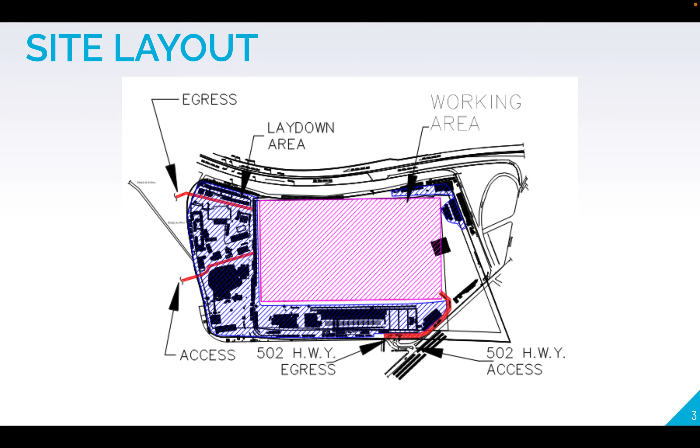When analyzing this project, there were a few issues which required further care. This includes one overall goal and two subsequent goals. First goal can be simply described as the epitome of construction, the three pillars of project management. This is to ensure that there is an adequate balance between project cost, duration, and scope to maintain the quality. This is paramount in ensuring that the project is a success for every party involved.

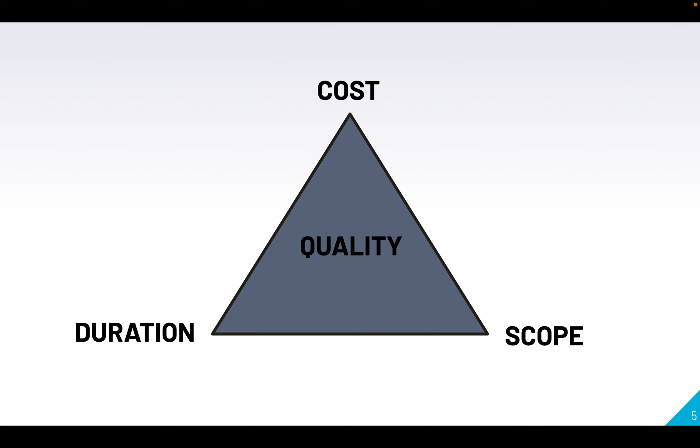The first consideration included selecting the appropriate dump sites for the disposed soil while considering the relationship between the dump site and vulnerable water sources. This also involves selecting the correct route to the chosen dump site or sites. The options for dump sites were 1, 2, and 3. Dump site 1 was the closest to the site, dump site 3 was the farthest, and dump site 2 was somewhere in between.

The catch was that dump site 1 was located very close to potable water and below the water table. Dump site 2 was a kilometer from the closest surface water body and above the water table and located in an area of potable water. Dump site 3 was a kilometer from the closest surface water body, above the groundwater table, and not located in an area of potable water.

The route options were Road A and the toll highway. Road A poses certain speed restrictions and time restrictions regarding how many trucks may be on the road during what times, and the tollway imposes no restrictions, but there is a fee associated with its use.

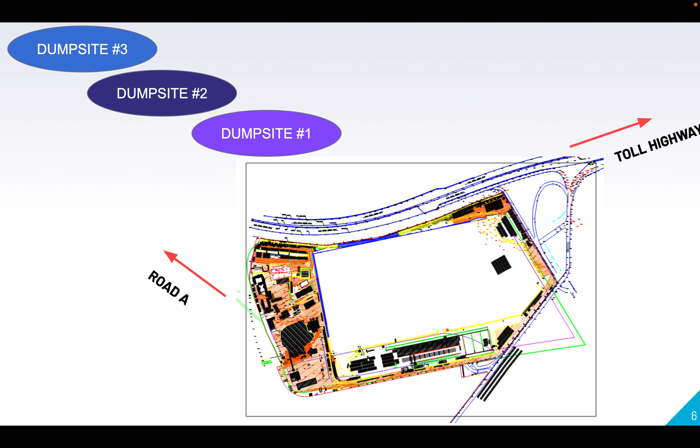Another issue included selecting which equipment to use and how many of each type so that an adequate balance between a minimal cost and duration was obtained while still maintaining the quality of the project. So this included selecting the graders, hauling trucks, packers, excavators, loaders, and dozers. We were faced with the option to buy additional equipment, and some equipment types had multiple models to choose from. This shall be discussed in further detail in the cost estimate section.

To solve these problems, a linear optimization was performed with the objective of minimizing the total project cost. The decision variables were the number of trucks of each type on each road. The constraints included that Road A could only have 10 trucks on it in the morning, the number of trucks must be a positive integer, the total number of trucks must be greater than 0, and that the hauling operations should be completed within a year. This was an arbitrary decision made based on the goals of the team.

And you may have noticed that only dump sites number 1 and number 3 were considered on the slide. This is because dump site number 1, as you may remember, is in an area vulnerable to contamination of the water. So it was decided to dump all non-contaminated soil at dump site number 1 to preserve costs, and all contaminated soil at dump site number 3 as it is not vulnerable.

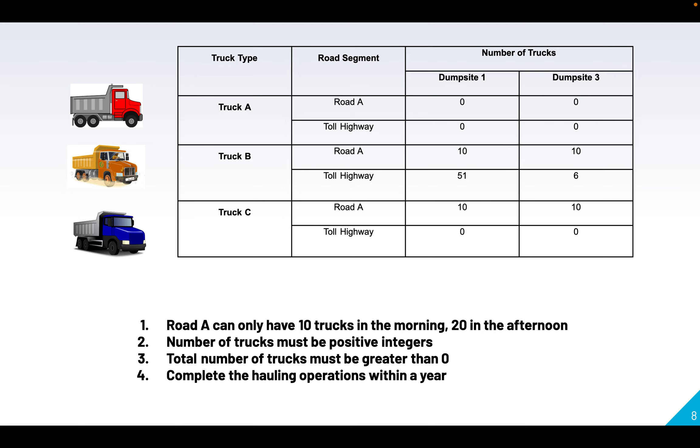Next, I will take you through the construction sequencing. We have identified 4 major construction phases. The first phase, shown here, is titled the pre-construction activities. These activities are defined as the works that commence prior to excavation. So this includes geotechnical investigation, construction of the site access and egress, site delineation with fencing, and exposing of utilities.

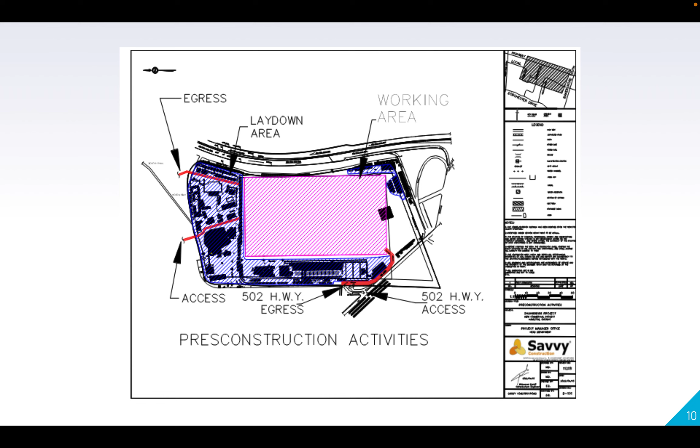The second major category is the removals and demolitions works. This includes site clearing to remove vegetation and the excavation of the soil. The third major category is the earthworks. This is a large portion of the project. It includes surface preparation for the foundation works, placing and compaction of the fill, fine grading the soil for the construction of the basement level, and quality control measures.

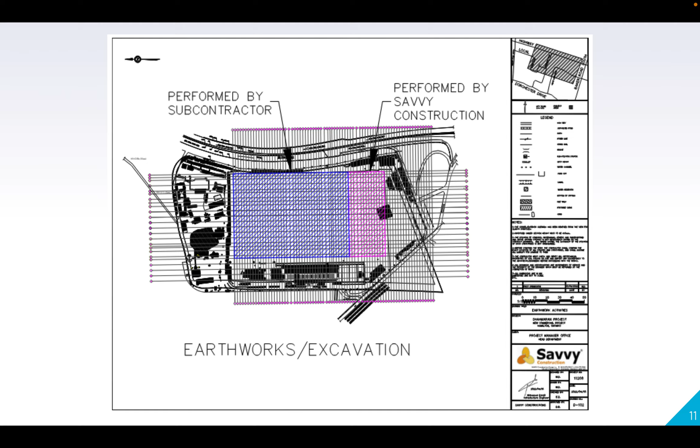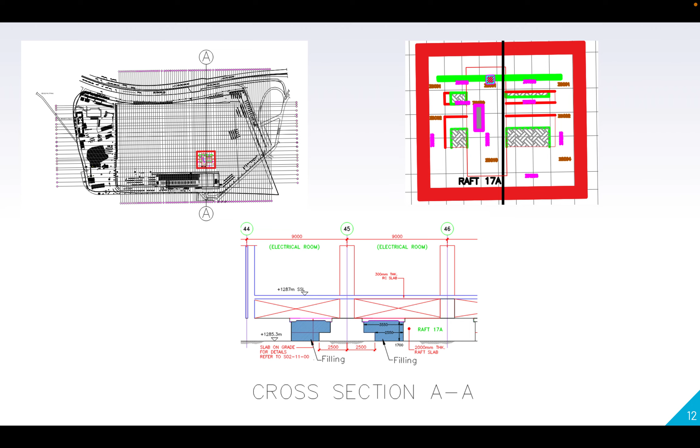The final category includes the foundations works and involves erecting the formwork, installing the rebar, pouring and curing the concrete, stripping the formwork, and quality control measures. Next, I will take you through our work breakdown structure, or WBS. The WBS for this project is separated into 2 categories, the indirects and the directs. This is in order to consider all types of project costs.

The indirects are separated into the staff, office supplies, securement of funds, purchase of company vehicles, and the purchase of construction equipment. The staff includes administrative, janitorial, and security staff. The office supplies considers the purchase of office trailers, equipment, and amenities. The securement of funds considers insurance and bonds. The purchase of company vehicles includes 5 cars for operations staff and a pickup truck for each foreman. The construction equipment purchased is described in the following section.

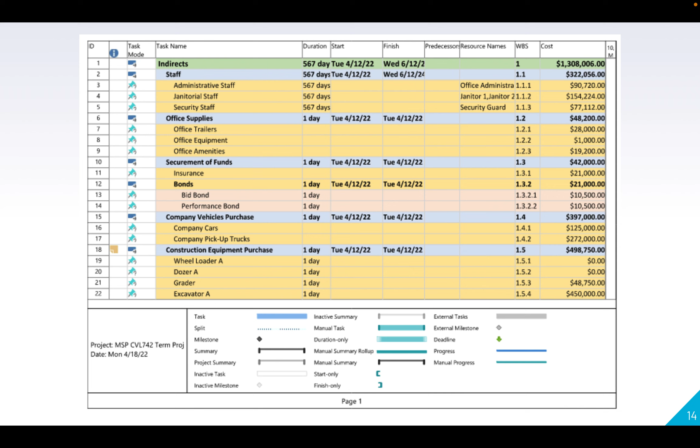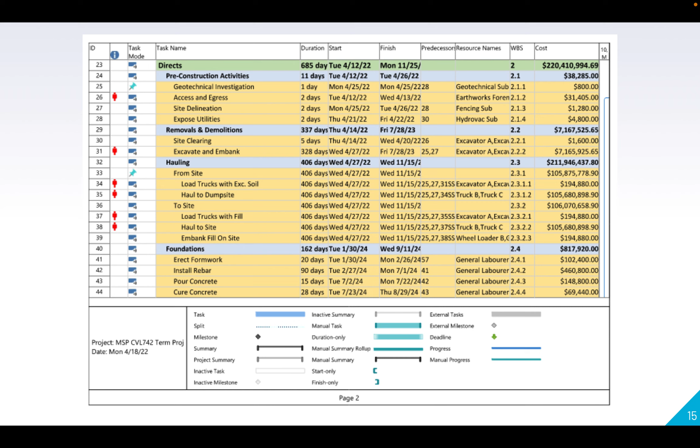Hello, my name is Elias and I'm the cost estimator on the team, and I will discuss the risk analysis and equipment cost estimation for this project. A risk analysis was performed to gauge the probability and impact of various hazards and dangers that may arise during the course of the project phase. A risk identification was first conducted, covering risks regarding equipment, soil disposal, the environment, worker and public safety, and on-site hazards. Some risks in this project were shared between Savvy Constructions and the applicable subcontractors that shall work on site.

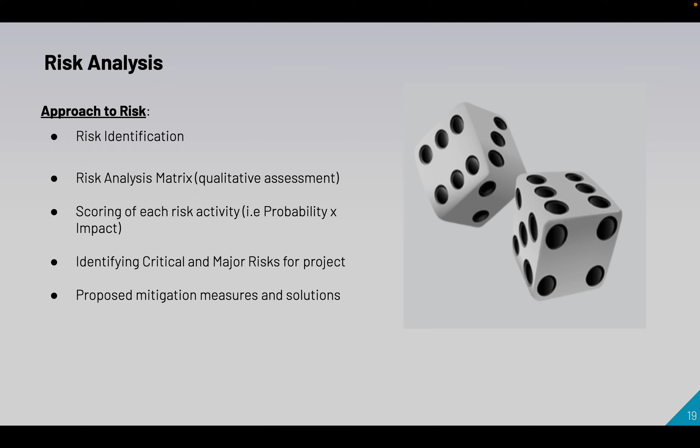A qualitative risk assessment matrix was created for the analysis. A score was calculated for each risk in order to quickly identify the critical and major risks. Finally, mitigation measures and solutions for each risk activity were proposed in order to decrease the severity of the impacts. The risk scoring system used was based on the probability of the risk activity measured from 1 to 5, 1 being very low and 5 being very high probability. And for the impact, the range was also 1 to 5, 1 being very low and 5 being very high impact. By multiplying the probability and the impact of the associated activities, the scores provided then translated to indications of minor to critical outcomes.

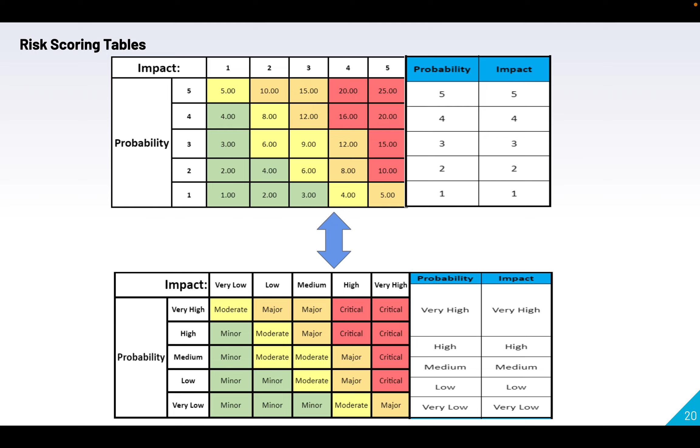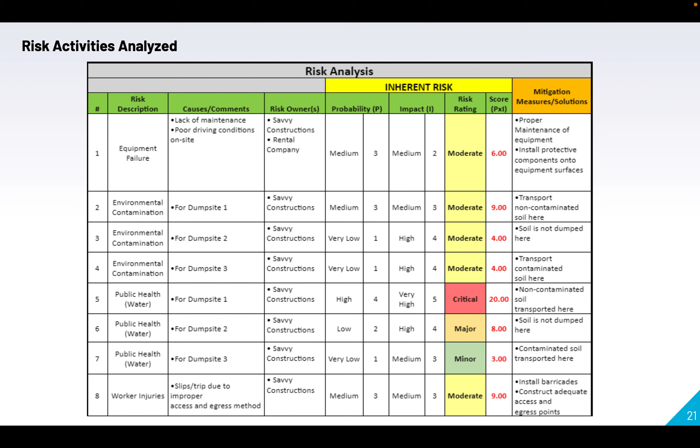The next 3 slides show the risk activities identified for the project phase, their causes, their respective owners, scores, and the appropriate mitigation measures to employ. The following risk activities from this analysis shown here are the activities that required the most attention and had an effect on the team's decision-making process. For example, in deciding whether to dump soil at dump site number 1, the risk of contaminating the potable water nearby was critical. Therefore, it was decided to only dump non-contaminated soil at this site.

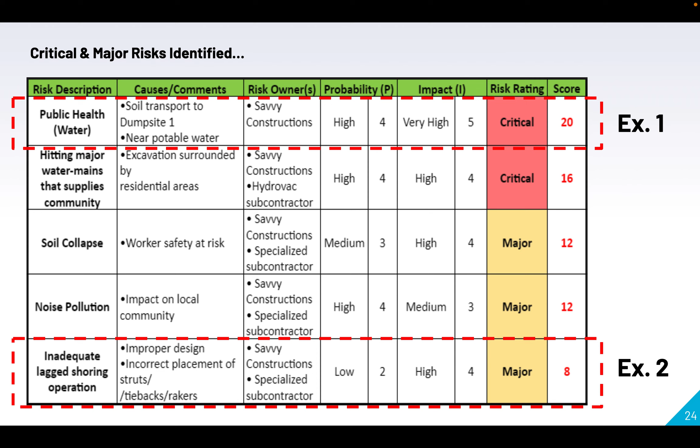For a major risk, such as inadequate lagged shoring operations, which could cause soil to collapse on company and subcontractor workers, ensuring that the soil conditions are sufficient when shoring is installed, and having shoring components, including struts, rakers, and tiebacks, adequately placed for bracing, can help in terms of avoiding unwanted consequences in the event that the activity is conducted below the company's standard.

For the equipment cost estimation, the following general parameters were applied to each cost estimate, which includes the fuel cost, efficiency, capacity of the equipment, status of the equipment, meaning purchased, owned, or rented, energy consumption, and operator wage.

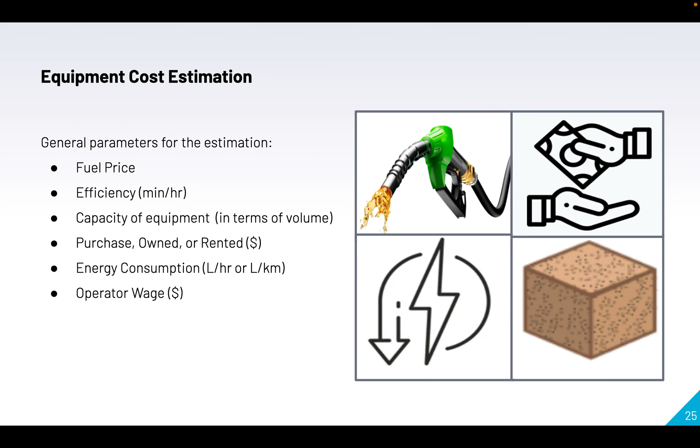For the truck cost estimation of dump site number 1, the volume of non-contaminated soil was considered, while for dump site number 3, the contaminated soil volume was considered. Key parameters include road and highway distances, travel time per trip, the maximum trips a truck can take within a day, the volume dumped per day, and toll price when applicable.

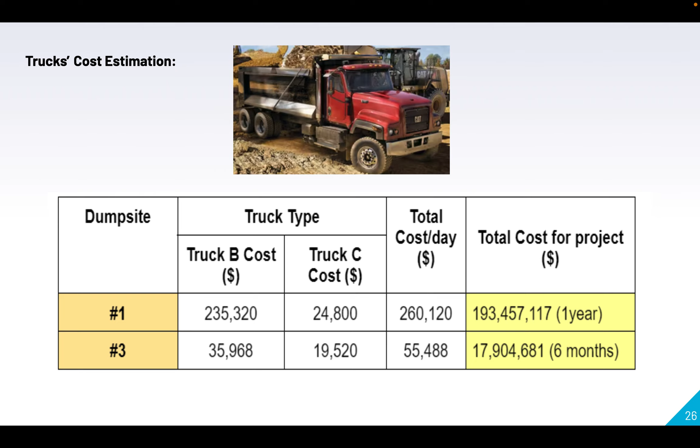The estimation found that the cost to transport to dump site number 1 will be $193,457,117 in a single year. And for dump site number 3, the cost will be $17,904,681 for 6 months transport time. For each of the remaining equipment items, productivities were calculated to ultimately find the costs. Starting with...

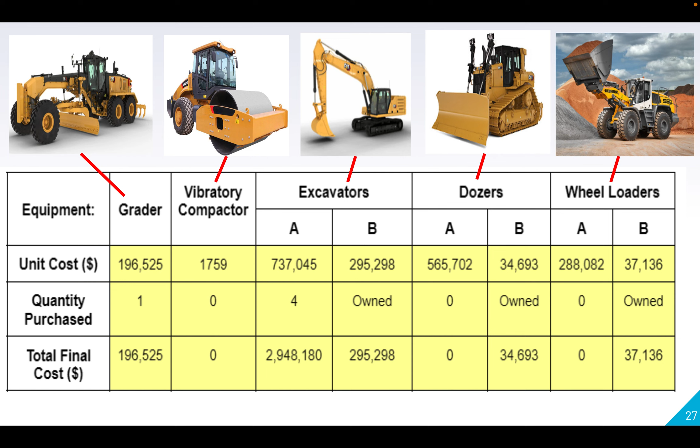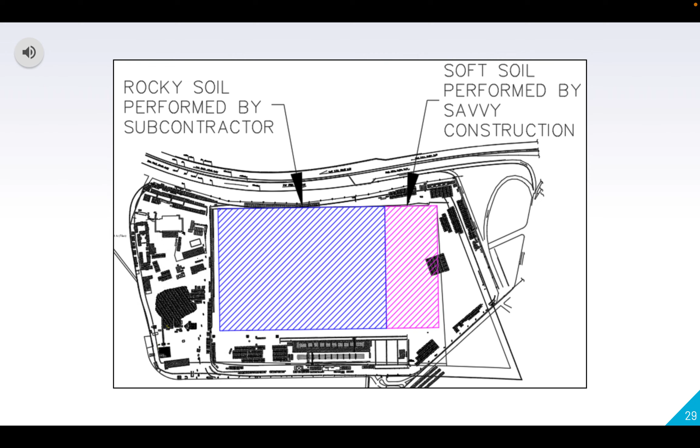The excavation stage is divided into 3 phases: rocky, soft, and contaminated soil. Phase 1 includes a rough estimation of the excavated material done by the subcontractor. This allows us to know the amount of soil to be transported. Phase 2, a thorough calculation of excavated material to determine the amount of soil to be reused and transported. Phase 3, contaminated soil exists 1.8 meter below the surface throughout the construction site. Savvy Construction will be responsible to provide contaminated free soil.

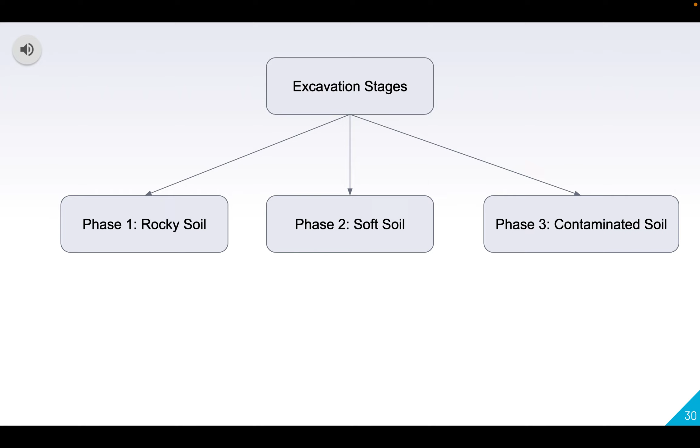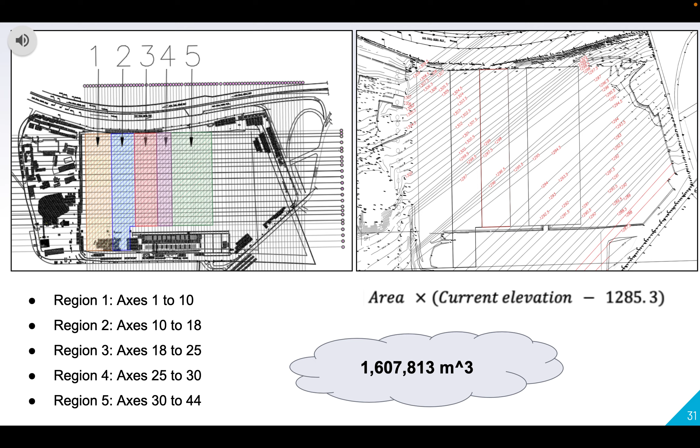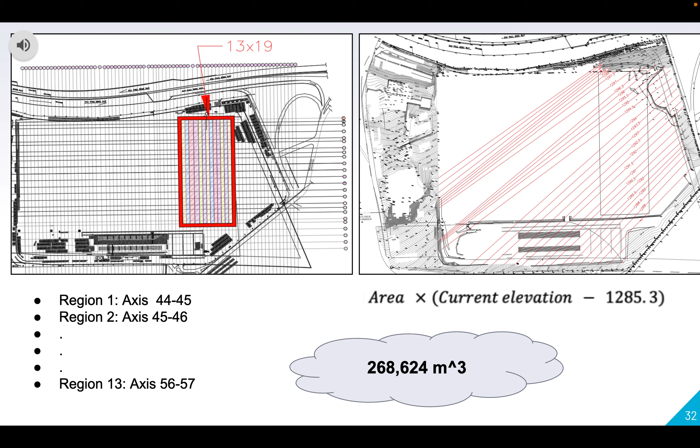In regards to Phase 2, it followed a more sophisticated approach, and soil regions were divided into each grid line. The findings were reported as approximately 270,000 of soft soil needs to be reused and/or transported to suitable dump sites.